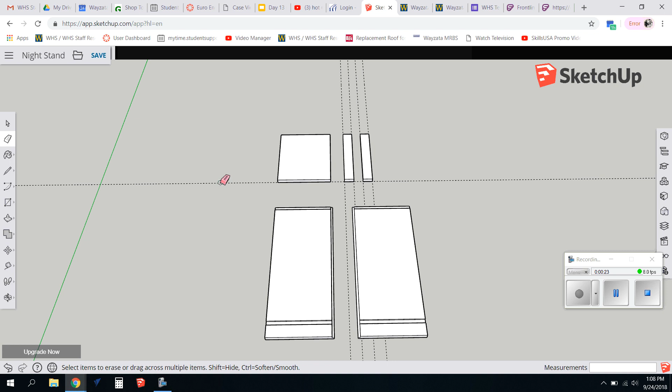Now we are ready to take our SketchUp drawing and bring it into a program called VCarve Pro that will turn it into the XYZ coordinates to use on the CNC router. This may be a little bit of review from the last video, but just in case you didn't get to that last video or you forgot, once you have your SketchUp file here, I'm going to go ahead and erase all of these guidelines because we don't need any extra geometry in on that drawing.

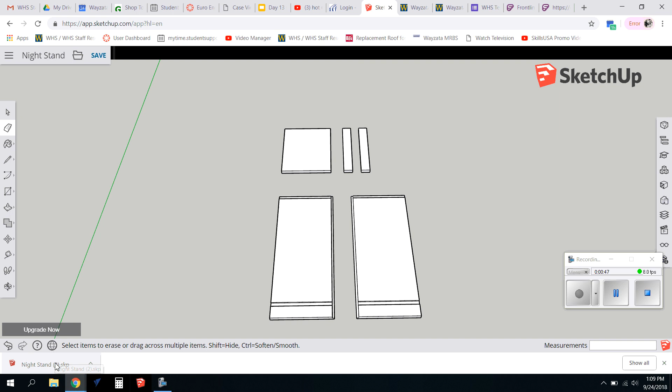I'm going to download this, and I always recommend that you download it to your network drive. This one I am just going to download to here and bring it into VCarve and save that in my network drive. So it's called nightstand2.skp. You may have it saved to something different, but now that I know that it's in my download folder, I'm going to come here, open up VCarve, say create a new file.

Now yours may come up completely different than this because I've used it before, so it always defaults back to the last time that somebody used it. So make sure you do this very carefully with me so that we are certain that we get this to be exactly right. So job size, that is this white page right here. That is the size of the piece of wood you're putting on the CNC router. The piece of wood is a 4x8 sheet, so it's 48 inches wide, 96 inches tall, and it's going to be 0.75 inches thick.

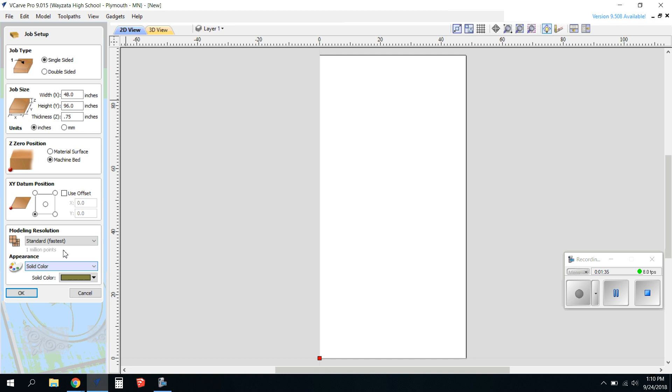This is the one thing that gets screwed up a lot. The zero position needs to be the machine bed, not the material surface. And our XY datum position is the bottom left corner. The rest of this stuff should be all good to go. And I'll hit OK. Now, I need to go get that drawing. So I come over here to say import vectors. And I'm going to find that. I have it in my downloaded file. If I was you, I would put that in your network drive.

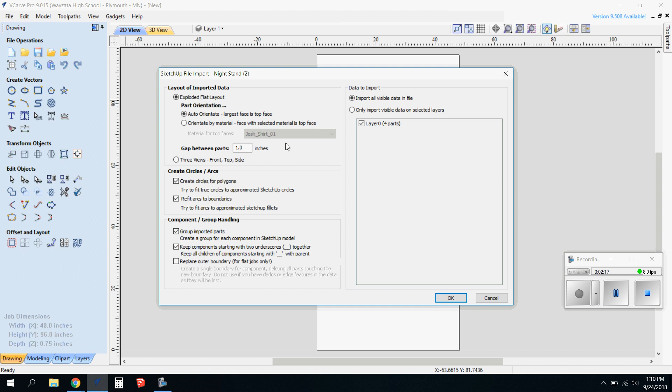Nightstand 2 was today at 1:09 p.m. Now this stuff's important. Exploded flat layout, auto orientate, that's good. Gap between parts 1 inch is good. We want to have all these boxes checked. Make sure that this one right here is not checked. If that one's checked, it gets rid of all your dados and rabbets. Import all visible data and say OK.

So there are my parts. It has it lined up vertically. That's perfect for us. We'll roll with it just like that. These, though, are just lines. It's not ready to run to the CNC router. We've got to write our tool paths for it. So we're going to start with our tool paths. We're going to start here.

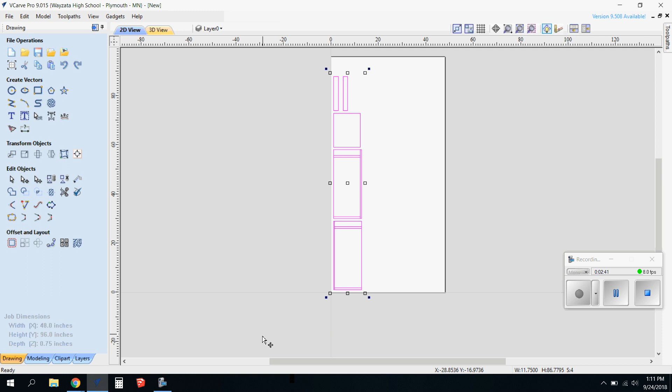And notice that it's all one big object. So I can't get parts separated. When I click on this part, so I clicked over to the white space, I click on this, it's all one big piece. I need to explode it or ungroup into original object layers. Now I should be able to mess with individual parts.

We're dealing with a circular cutter on the CNC router. So if we would just have the CNC router cut out the dado here, we would have rounded corners. So what we need to do is make this a little bit bigger than what it needs to be, so we go a little bit past and we don't have the round corners that the router leaves us.

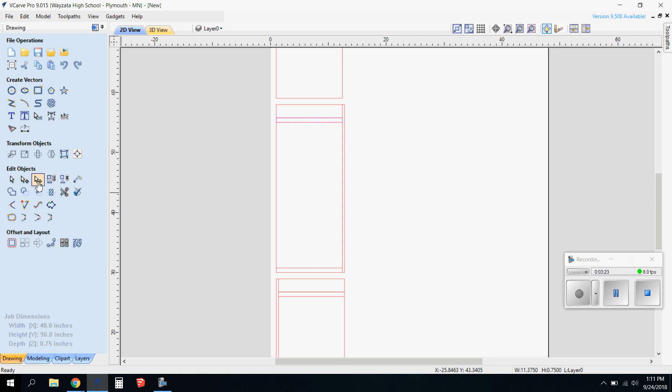So I'll come over to here to edit objects, and I'll make sure I click the edit with the compass on it. And I can zoom in with my mouse by scrolling the scroll wheel up. And I'm just going to enlarge these rectangles just a little bit. Same thing for the rabbet.

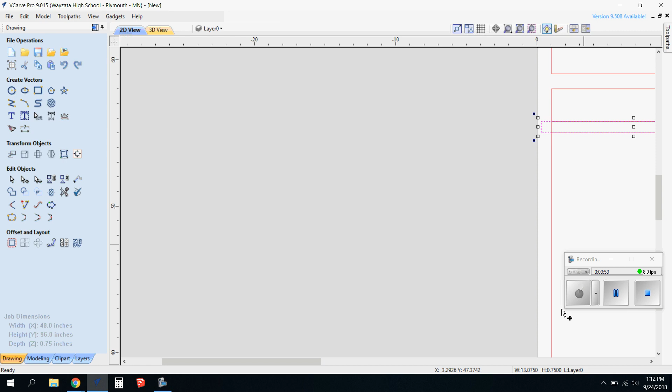And the closer you zoom, you don't have to make it as big as that one was there. I wasn't zoomed in very far. I'm actually going to make this a little bit smaller as well. Don't need it to go too far. The trouble if we make them too big is that we'll run into the part next to ours and we'll waste some material. Well, there's that one.

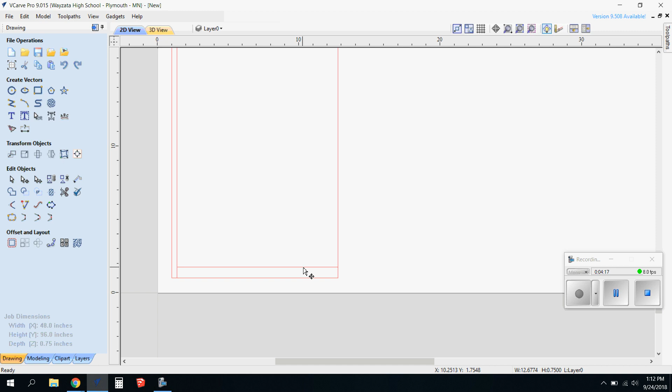I'll have to do the same thing here. Ungroup back to original layers. Then I can grab just the rectangle for the dado or rabbet and pull it out. Pull it out, and the last one here we will also pull out. Okay, I've got all the dados done.

So now what I'm going to do is select all of the dados by clicking on it, and then if I hold down Shift, I'm able to select more than one. If I accidentally click on something that I shouldn't, so if I accidentally clicked on this line, I'm still holding down Shift. If I click it again, it should deselect. Oh, I accidentally moved it. Well, that's not working. So I'll just click away, come back, click all these again.

Now I'm going to come over here to toolpaths. We've got lots of options for toolpaths. A profile toolpath follows a line. A pocket toolpath cuts everything out in between the two lines, which is what we'll do for dados. Cut depth for all dados, 1/4 inch.

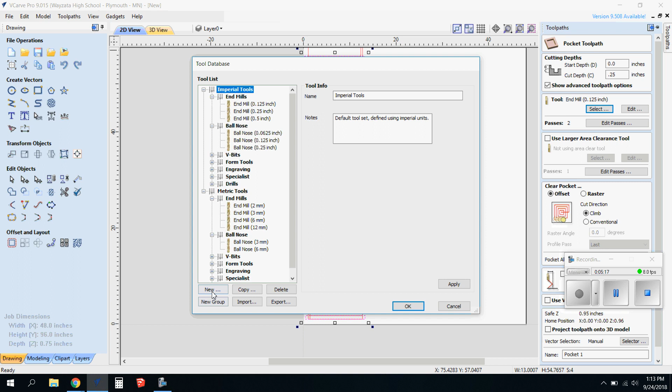Then I've got to select a tool, and I may not have the right one. So I'm going to click on New. I'm going to call it an end mill, 0.375. That is the diameter of the cutter. Its max pass depth is 0.76 inches, so you're going to have to fill all this out on your own. Its stepover is 80%.

Spindle speed is 18,000. The feed rate is 130 inches a minute. And the plunge rate we can say is 70. This is real important here. We've got 8 different tool positions. It could be one of 8 tools. This is tool number 1.

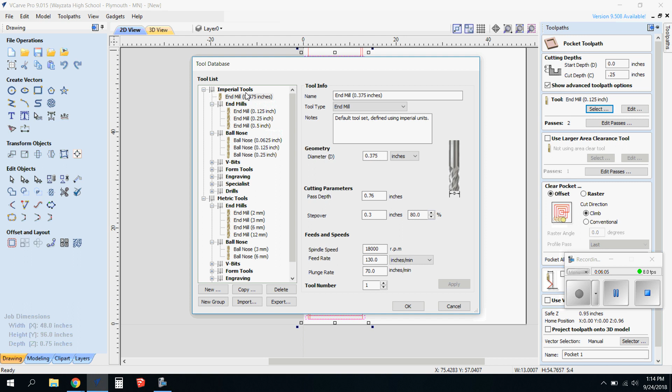I hit apply. You can see it creates it right up there. And I hit OK. So I've got that tool. Sometimes that disappears. I've got that toolpath selected. That's good. Ramp plunge moves means it's not going to go straight in. It's going to kind of ease its way in. With an inch, that's fine. Your window may be bigger than mine. That's totally fine. And we're going to call this dado.

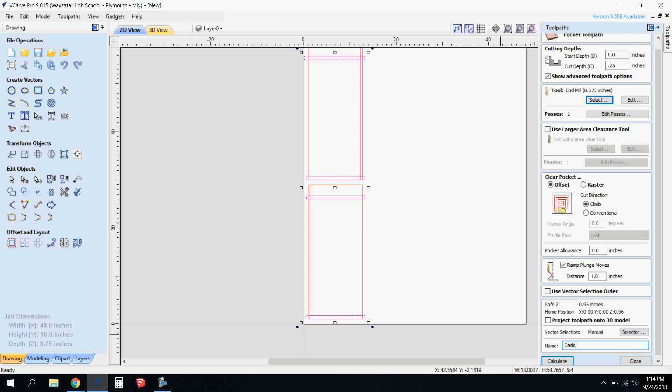And then we're going to calculate it. And then we're going to see in the 3D view up here that we got the dados and rabbets calculated. Okay, so that toolpath is done, and you can see the arrows on here. Next thing we're going to do is make the rabbets. So just like with the dados, those rabbets in the back have to get extended, so we're certain that we get the whole rabbet in there and we don't have any curves.

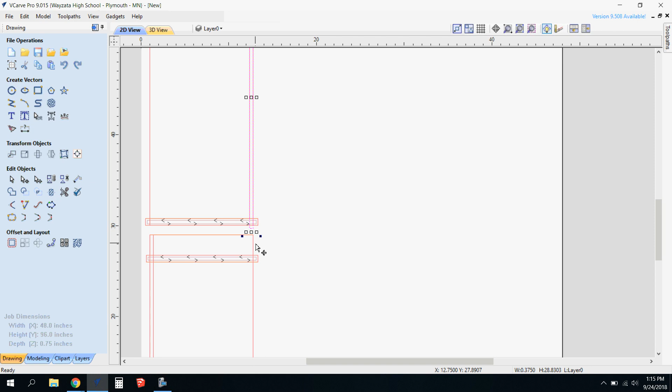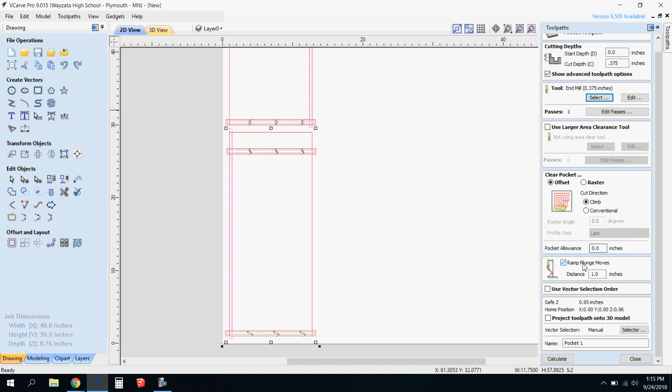Okay, that one's already selected. I'll click over here, select that rabbet, come back here. I'm going to close this, and we're going to make another toolpath. Cut depth for your rabbet, it's going to be 0.375 or 3/8 of an inch. We can use the same bit. Hit OK. This is all good. That should be saved from before, and we'll call this rabbet. So now we see we've got dados and our back rabbet in.

Getting close. Now we're going to click on this outside line. This is called the profile toolpath. So this is what's going to actually cut out our 3 pieces, our bottom shelf and then our 2 sides. This is going to be a profile toolpath. And this one we want to cut all the way through at 0.76. So 0.75 is the thickness of our material. This way we're going 10 thousandths through, and we're certain we get all the way through.

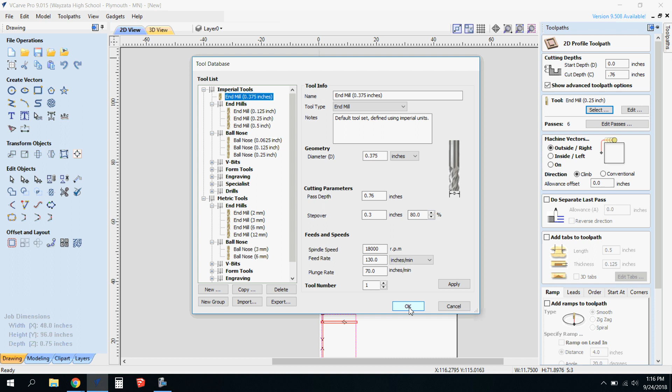We're going to select that same tool again. It says pass depth is 0.76, so we'll be able to cut all the way through. Still tool number 1. Hit OK. Next, the machine vectors. This is where the center of the tool path is going to be, or this is where the tool is going to be.

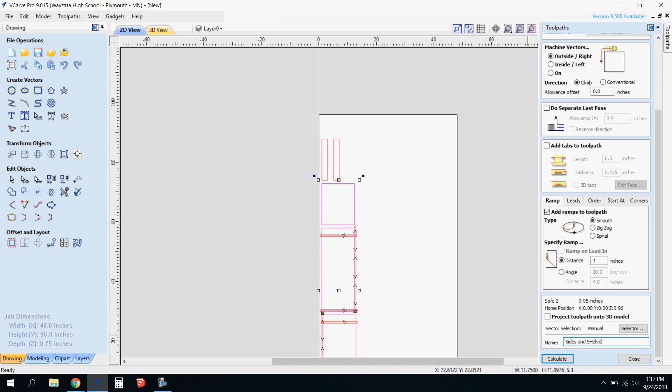We can either have it right on the line, so it's half on, half off, inside or outside. We want to make sure that we're on the outside of the line. This will keep your part the right size. We want to add ramps of 1 inch. We're going to call this sides and shelf.

You'll get this warning telling you it's going to cut all the way through. That's okay. And then we can see, boom, we got this blue outside cut all the way through. And the last thing we need to do is these stringers up here. That's okay that they come up together. If they don't, you can just draw a box around them. We want to have them both selected.

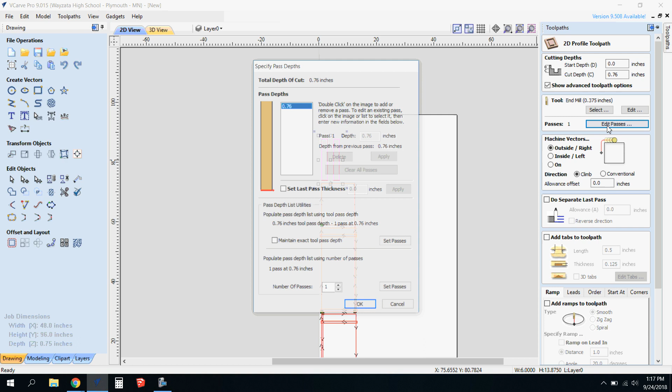Tool path. It's going to be the same profile tool path. Cut depth is all good. Now here's the only thing we want to change. We'll use that same tool. Under edit passes, we want to do this in 3 passes because we don't want it to cut all the way through. Sometimes little parts have trouble staying put or being held in place by the vacuum pump. So we want to make sure that we do slower passes. We don't put so much stress on the wood that it pulls these out before they're supposed to come.

And the other thing to help us with that is we're going to add tabs to the piece. And what a tab is, it's a little tiny piece on the very bottom that doesn't cut all the way through. So we're going to actually add 4 of them. There'll be 4 spots where this tab holds the thing in. So it's only about a 1/16 of an inch deep.

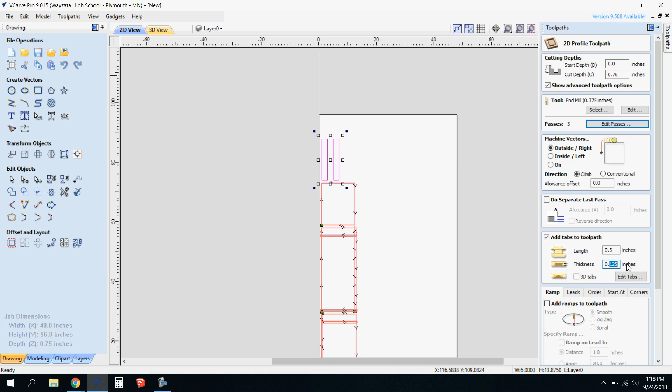So the thickness 0.0625, and then we're going to say edit tabs and say put 4 of them, and you'll see. So in these 4 spots, there's going to be just a little tiny, almost paper thin piece of wood that stays in those 4 places to hold my part in place so it doesn't move. We'll add the same ramps. We're going to call these stringers. Look, if I could spell.

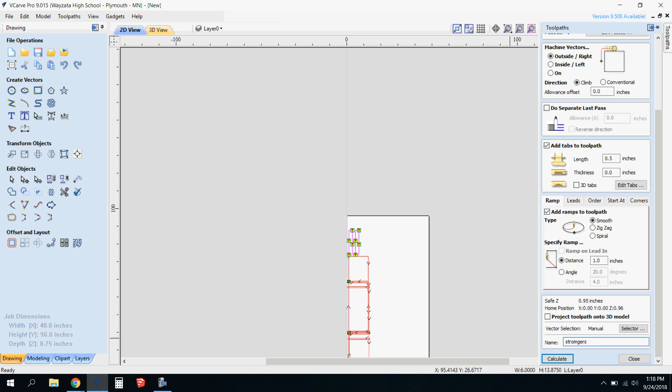It's okay that we cut all the way through. Tab thickness must be greater than 0. So I screwed something up there. Let's go back. Oh, there we go. Thickness 0.0625. It might be that those are too thin. Let's try again. Oh, that worked. I just had them at 0 instead of 0.0625.

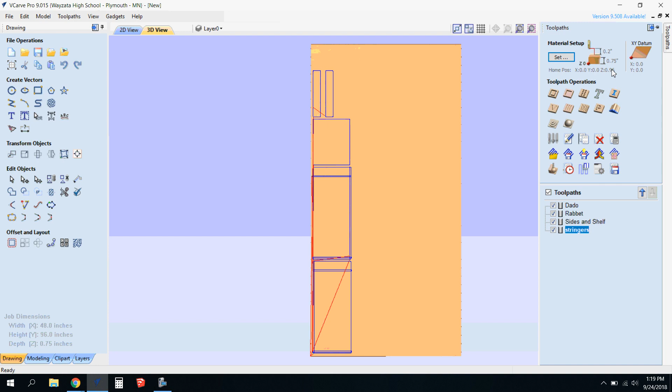Now, if I want to save this, I always will double check these. Okay, we're good. Now what you need to do is you're going to save all this. So if we click back here, we can see that we are on the machining tab. We see all of our tool paths. We need to save this VCarve. And then you'll get the flash drive from me. It's over by the CNC router.

The flash drive will pop up here, and you'll say, I need to save this to the flash drive. Then we're going to bring it over to the computer by the CNC router. And I'm going to double check your tool paths before we cut it out so we're certain we're not making big mistakes. Please save it as your initials. I'm KLS, and we are block 4. So I'd be KLS4, and I would save that on the flash drive.

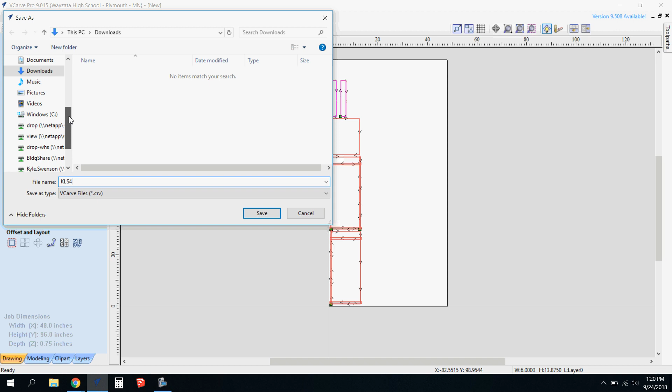I'm going to save it in my network drive because I am not bringing the flash drive over at this exact moment. But save it onto the flash drive, and then we can get this running on the CNC router.